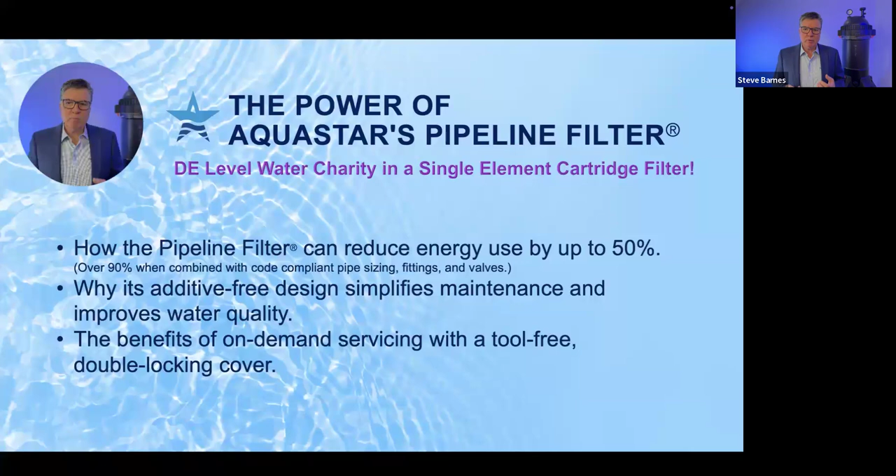Of course, we would love for you to try and use our pipeline filter, but there's really things in this presentation that will benefit all of our pool industry pros, pool owners, and everyone alike by applying some good quality principles to all filter technology.

So with that introduction on where we're going to spend most of our time, I do want to tease that for those of you that were not in Dallas at the International Pool and Spa Patio Expo, sorry Scott, we introduced the new 3, a partnership between Poolside Tech and the Pool Attendant.

Raypak, who makes multiple heaters and hot water heaters, you maybe know them better as Rheem. And then, of course, AquaStar.

We have partnered to basically fill out the pad with us, 3 American-based, privately owned companies working together to bring new opportunities, and for sure safety, in this filter behind me.

You know, the Avia heater and what Raypak does with heater safety. Poolside Tech has got all kinds of safety built into it, knowing if valves are in the wrong place - that's a state-of-the-art control system.

Efficiency - you combine all of these technologies together to come up with a pad that's, in my opinion, best in class for efficiency. And innovation - these are award-winning products, and I've got a little video showing that. Multiple years where these products were national award winners, so we can say look at that, it's not just our opinion.

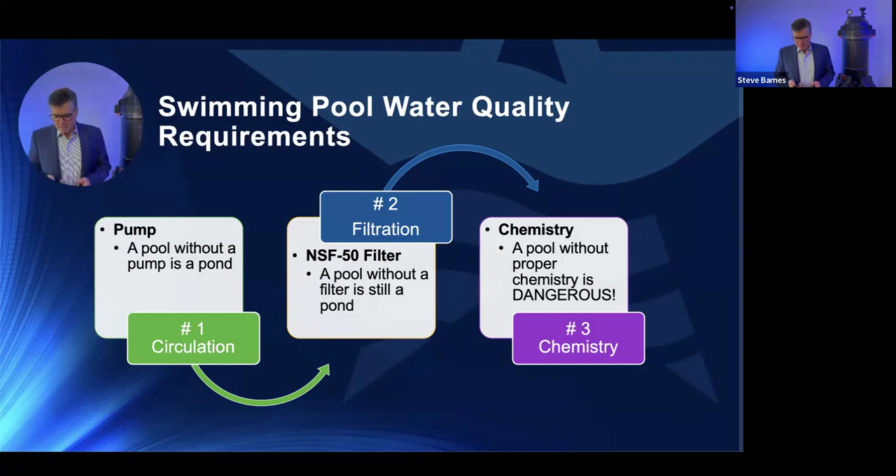So I'm going to focus on number 2, filtration. I think you're going to discover some new stuff here that was new to me within the last couple of years. First of all, NSF filters need to be certified to NSF ANSI Canada 50. That's the standard referenced in the Model Aquatic Health Code, the International Swimming Pool and Spa Code. You look at the PHTA ANSI standards, IAPMO's pool code - any of these, they are all going to reference the NSF 50 standard. That's why we're going to focus on that in detail, because it regulates how these filters are produced.

One of the core elements of the NSF 50 standard is pressure safety, air relief valves, all kinds of things related to that, and cleanability. But really, why do we use filters is to clean up the water, and the term for cloudy water is turbidity. What the NSF 50 standard requires is that every filter go through a turbidity reduction test, comprised of water that's made cloudy with silica number 140.

It's a product you can look up in the NSF standard. It's basically silica sand, from sort of sand in your hand all the way to just a fine powder. When you mix that in, per the standard, into the test tank that we're going to call our pool, the turbidity level looks like milk, is the way it's been described. I haven't personally seen this test at NSF, though I've seen a lot of others. The turbidity starting point is measured in NTUs, the units, like PSI is for pressure. So turbidity units are NTU, and that milky water in this case starts out at 41.

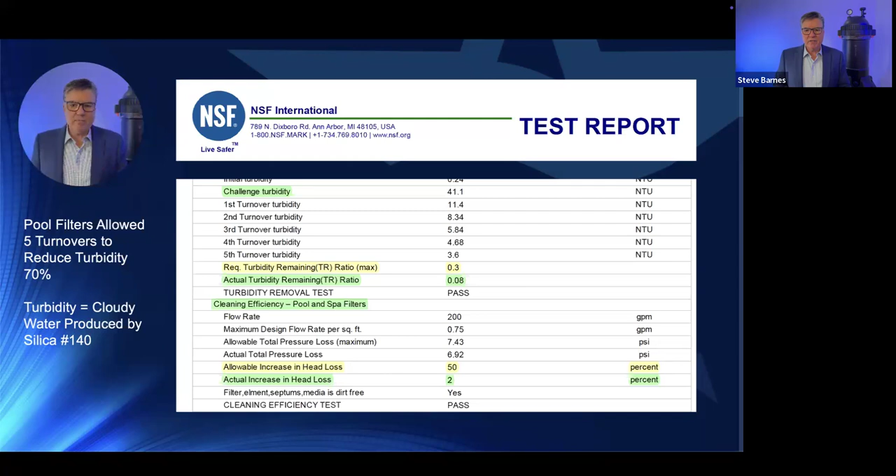So moving along, this is looking at the statistical side, which I learned from studying and attending Dr. Amburgey's World Aquatic Health Conference presentations on this subject going back 10 to 12 years, reading his research papers, and also doing research as part of science compliance for AquaStar.

If we look here, NSF 50 level 1 is if you turn over that pool one time and it removes at least 70%, reducing the turbidity by 70%, then that's its passing level. I think we could call that an L1. It's not an official designation, but with flow meters and test kit accuracy and all kinds of things at NSF, they label the top performers L1 down through lower levels. For flow meters, I think there's an L20 or something like that. So I just applied that concept to this.

Now by comparison, if we go up to the L0 - I didn't know what else to call it - that would be a 100% efficient filter, and they exist. They're called RO filters. The problem is if you've been around them, your faucet will run at 9 gallons a minute, and you're lucky if you can get a quart a minute out of an RO system because they filter everything out so finely. For every gallon we receive from RO, most systems require backwashing with 5 gallons, and even then we have to replace them depending on how nasty your water is - maybe 3 times a year in a really bad area, or once a year otherwise. So the bottom line is the technology to filter 100% is there, but it's not practical in the pool industry.

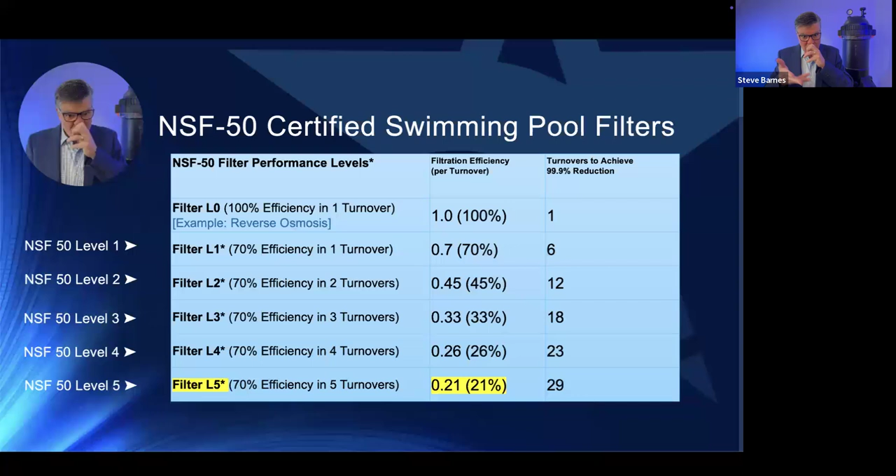Now, I actually have pictures, but they didn't make it into the presentation, of two RO cartridges. Actually, we just use them for pre-filters, so they'd be probably what we'd call an L1. The way those cartridges work, threaded into sort of canisters, is they collect the debris in the fabric, and they're real thick. They ultimately will plug up, just like an RO system, but there's no way to backwash them, so we throw them away and replace them.

So every 5,000 gallons, we replace our fill water filters in the lab. That's what I have pictures of, but not in here.

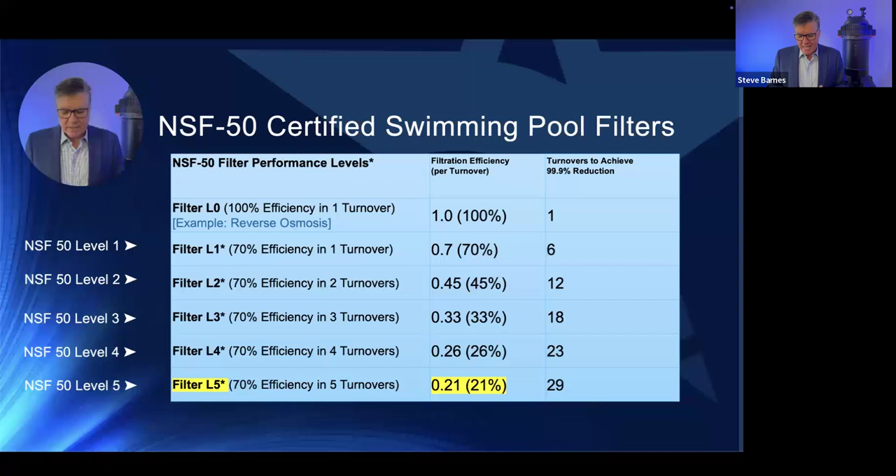The reason I point this out is we can definitely get to really high turbidity reduction with very common filter media that's out there, that our filter manufacturers make for RO and that kind of thing. But the problem is you can't clean it, so it's a replace-it kind of scenario. That's why we don't use it in the pool industry. We could, I guess it would be a revenue service until they replaced your filter.

But anyway, so that's sort of the backstory on that. Long answer, sorry about that.

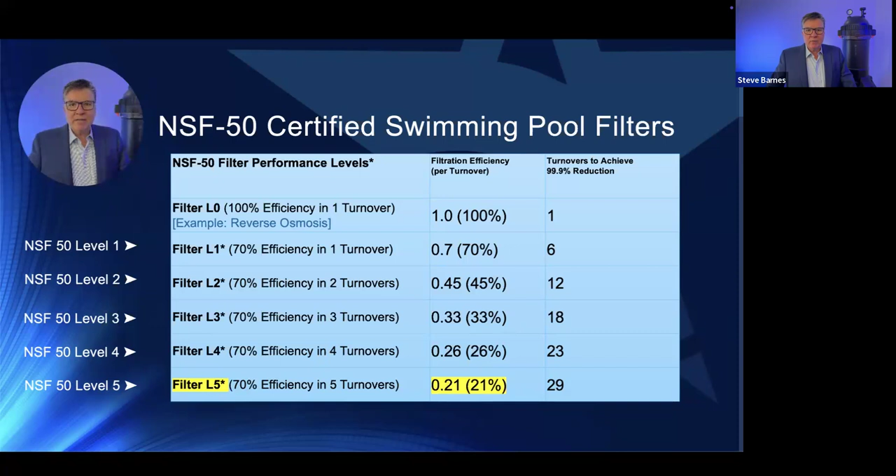Oh, that's good. And you still have your hand up, so if you want to put it down, that way I'll know if you have it raised. Oh yeah, it's like a regular Zoom meeting.

Okay, so here's just a close-up where the level one, I'm just zooming in for those people that questioned, wow, it's not a 520 square foot filter, so the pipeline can't be as good. Well, here's the proof. So one turnover, we go from 41 to 11.4, that's the 72%. And then you can see the turbidity reduction, where we end up at 3.6. You can't, water's clear at 5, just to give you an idea.

Well, I thought I saw you putting your hand up there, Scott. I was going to say, five turnovers, that was just...

Yeah, so as soon as you pass 70%, which we did in one turnover, DE does certainly in one turnover, but it would have an even lower NTU value. So with the pipeline filter, let's say it was 11.4 after one turnover. What my understanding is, DE would be down in that 4 to 5 range in one turnover. So there is a big difference with DE versus the pipeline filter. But when we look at the turnover, within 2 or 3 days you have DE level water with a pipeline filter versus in one day with a DE filter.

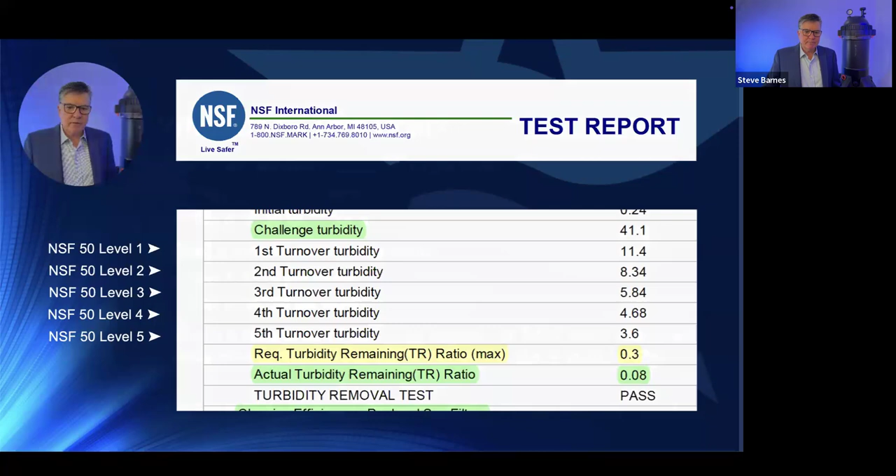Now let's put this into comparison, if you will, or sort of what does this mean. So let's say the electrical cost is 15 cents per kilowatt hour, and filter A, which is a level 1 filter, turns over the pool in 2 hours. For whatever reason, we're going to operate them identically.

So it takes 2 hours to achieve the 70% with filter A, which is L1, while filter B being an L5, to get to that same clear water as measured during that filter testing, you're going to have to run that pump for 10 hours to get to the same level of water clarity.

So you can see that's a big percentage increase.

If we take that out to a month, and obviously we're running filters—well, that gets into the program I'm going to come up to next. So if we look at that over the course of a month, filter A is $9 a month total cost, and filter B would be $45 a month to achieve the same clarity based on identical test circumstances.

So if somebody dumps a bucket of silica sand in the pool and we want to get it all out—remember there are two other elements: we need a pump, filtration, and circulation. We have to stir up the stuff in the pool, and we have to run the pump, because if it's not running, we're not going to filter anything. If everything's settled on the pool floor because we've turned the pump off for 18 or 16 hours a day, the only way to get that silica off the floor is to brush it, vacuum, or use an automatic cleaner.

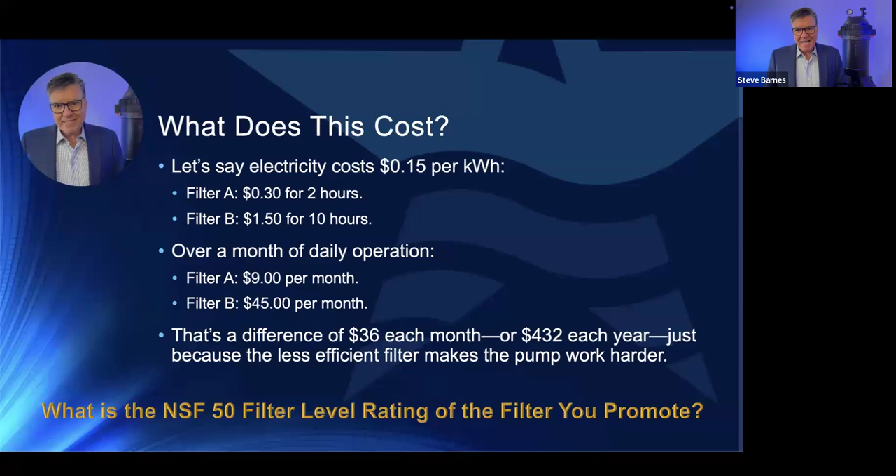So this gets really complicated, and this is just analyzing the filter itself. My challenge to you is, for pool pros: what is the efficiency of the filters you're installing? Are you a $9-a-month service provider or a $45-a-month service provider? Or maybe you don't care because the customer's paying for it—it's their electric bill. Anyway, that's kind of the philosophy we're looking at here. We think we can do better.

So now I want to take a couple of minutes and go into some of the features. Let me just look—I think my next part, after this, yeah, after this, we will have the filter salesy bit kind of stuff.

So this is the pipeline filter. This one happens to be 200 square foot, and we also have a 250 square foot. Not that the square footage matters, because we're talking about performance, but that's how the industry sort of knows them. That one's just 7 inches taller—it's the identical filter element.

One of the key features of this—when we got into it, Olaf, the owner of AquaStar, came in and said, 'Hey, I want to do a filter.' And I was like, oh boy. I sat quiet, and then went around—oh, we can do all of these things. They went around the room asking how many want to do a filter, and sales, engineering, management, everyone gave a thumbs up, and I gave a thumbs down. The reason is because of safety.

In 1989, when I was working for the in-floor cleaning system company, a homeowner was literally killed by a filter. It split in half—it was stainless steel. The problem was the bolt wasn't tightened. They were told to leave it alone, but the homeowner turned on the pump anyway, and it knocked her over into a block wall. We got called in. I came in to represent the company and had to go through that whole legal process. The filter lid ended up three backyards down.

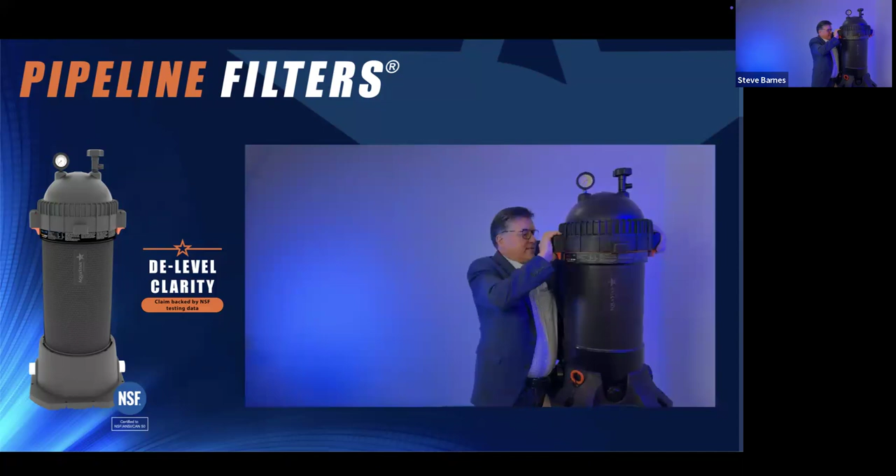Sorry to face away, there we go. This helps when you have it connected to pipe and plumbing. So, okay, let me go back.

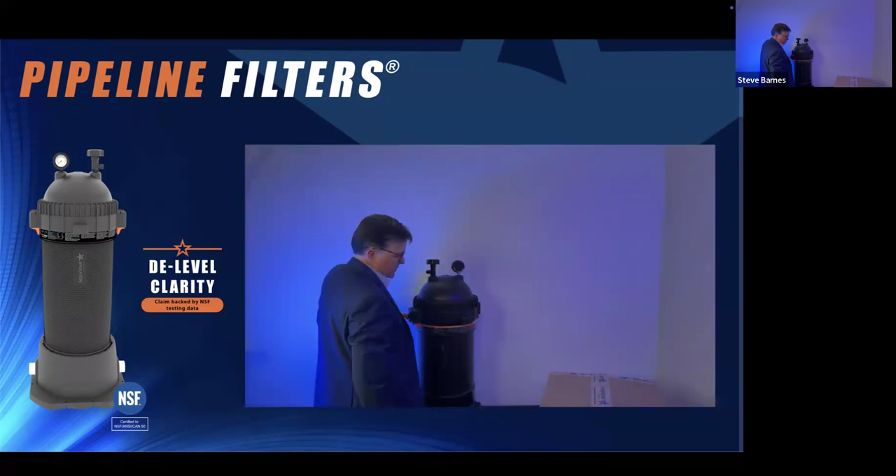So, 2 hands to unlock it. Then it comes around, it's decompressing the O-ring right now. When it comes around, you hear it click again. It's locked, but this is completely free on top. So if the pump was running or there was pressure, it's just going to relieve that pressure, and it's designed to literally blow down the outside of the filter. So you might have a bad day that it gets your tennis shoes wet, but it's not going to take your head off. And then to finish releasing, you have to unlock it one more time again to remove the human error factor, and it just comes off.

Convenient is this spin, so you can always point the air bleed valve and the pressure gauge any direction you want. And then after that, it's very easy to get at the cartridge filter itself.

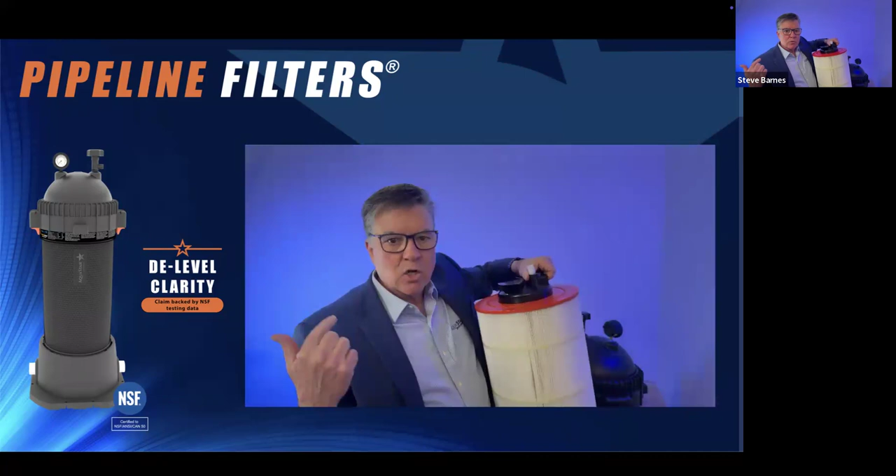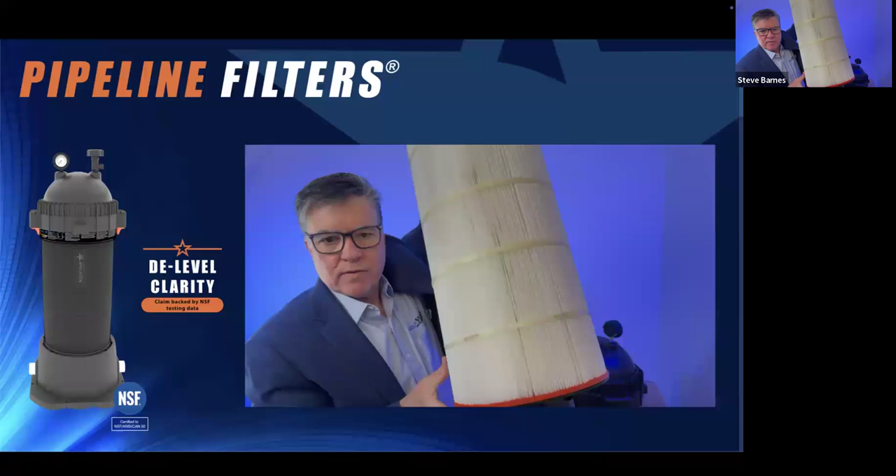Now, this is a proprietary design insofar as our filter element is really big and deep. We designed this entire filter specifically from a hydraulics point of view so that the water comes in from the bottom. It goes 360 degrees around the edge of this plate, because you can see this is solid. Water comes in out here by where I'm standing, but you see these little divots here? They not only center the filter inside of the pipeline housing, they create nozzles that spray the sand, silt, and debris up the outside edges of this filter.

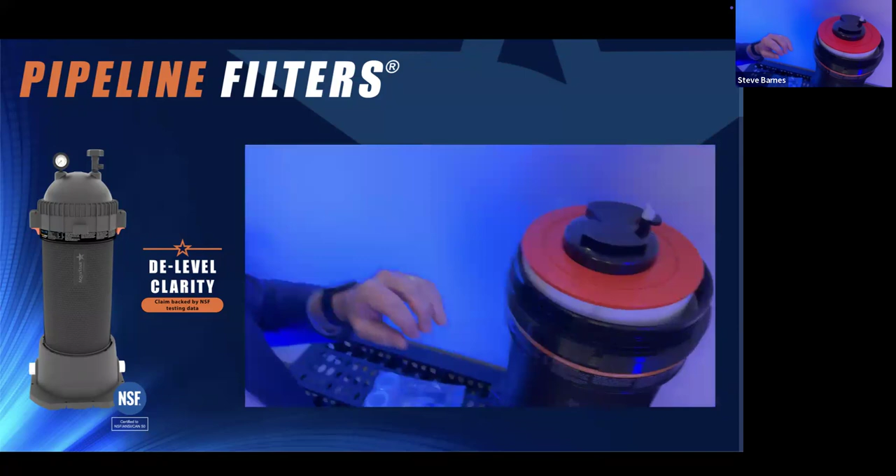Because this is such an important feature, I'm gonna unplug this camera and we're gonna go walk about. So if we look here, see this clearance? It's uniform all the way around. Oh, I'm gonna make everyone dizzy, including myself.

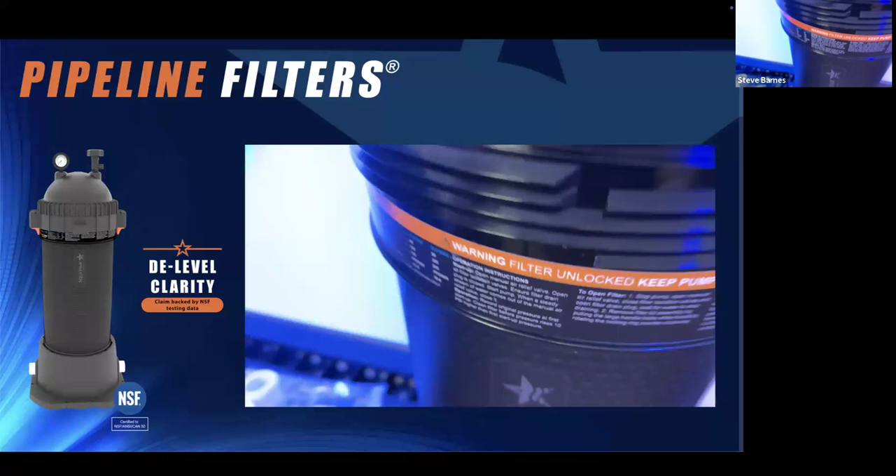So what happens is the water comes in from the bottom, it sprays all the way around, it goes up underneath the dome, and then it evenly coats the cartridge elements.

And because they are spaced, we did not chase square footage. We could have easily put 300 square feet into this. It's real simple, all you have to do is just put more cloth into it. So we could create a Kleenex box and try to filter through the edge of it and claim and match 300 square foot, or 320, or whatever. But that doesn't filter well, it just creates a lot of back pressure.

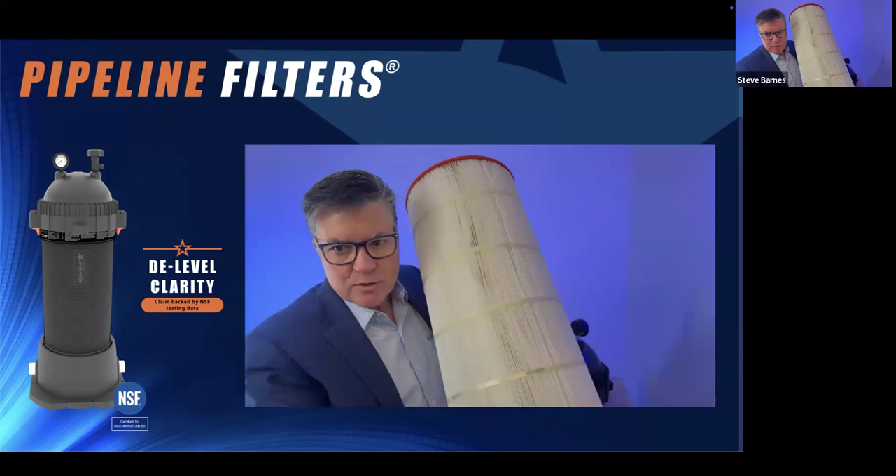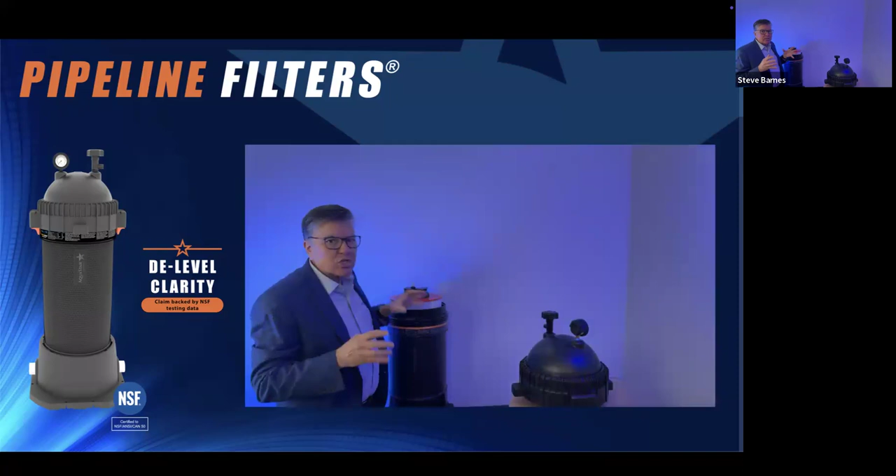We focused with the expertise of the people who make this, it's Pleatco Pinpoint, so they are the experts in that. We were the experts in the hydraulics, I would like to think. And so each one of these pleats, inside and outside, is usable surface area. And that's where we're able to get that turbidity reduction of 70%, 72% in one turnover, because we actually are capturing that silt throughout all of those pleats.

So instead of the pleats being like this, where it's only going to get stuck on your fingertips, they're open inside and out, if you will, so the water can come in and flow into the center. That's giving us our best, not the very best, but one of the best hydraulically efficient cartridge filters.

And by comparison, this is NSF data: this one out of the box compared to a 520 or any of those in that class — I'll use that one because I know the math — is 7 PSI less with brand new clean filters. So out of the box, if the other filter running at 100 gallons a minute, or whatever that test is based on, I think it's 150, it's at 10 PSI. At that same 150, this filter will be at 3.

So think about that from an energy efficiency standpoint. One, your pumps can run slower, and it's quieter and saves energy. But also that means with this filter, you can go 7 PSI of debris before you get to where the brand new, much bigger one would be. So filter square footage just doesn't matter.

And if I'm wrong relative to those other filters, they have the same test reports we do, and they can share them, and then I'll stand corrected. I can only use what I know publicly.

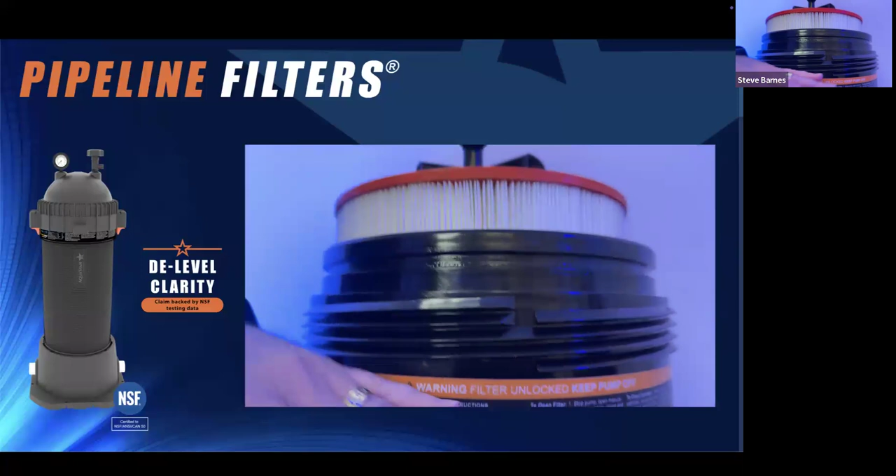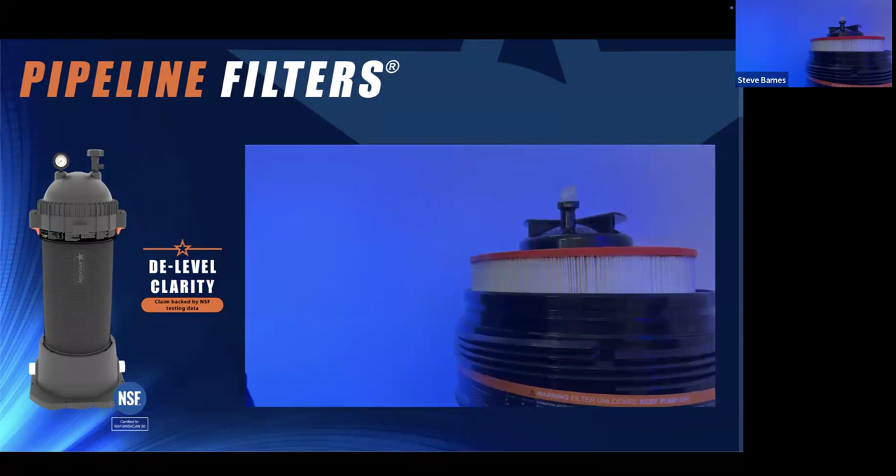So we have the hydraulic benefit, we have the safety benefit, and the way the safety benefit works, I'll show it because people have these things. If you look here, there's basically 2 sets of threads. One is plenty strong enough to go to 200 PSI, which is what this filter has been tested for. Then when you continue to raise it up, it's still got 100% of that 200 PSI strength, even though the O-ring has been disengaged. And that's where the safety of this comes from. Combined, giving you a little behind the scenes studio view here.

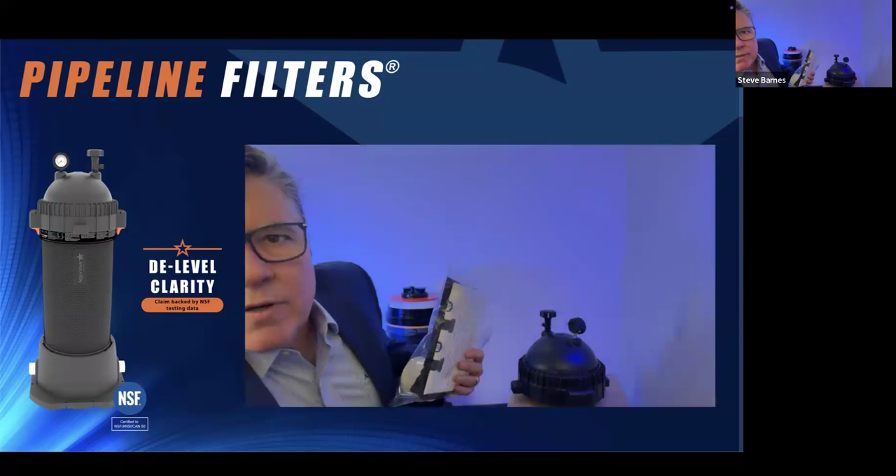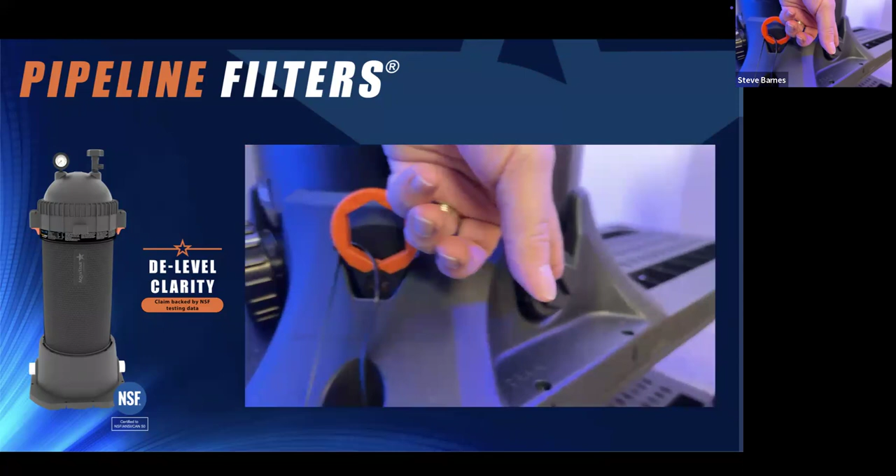So that's the key to the safety feature of it. Down here, you see this interesting tool - it's zip tied down. This tool comes with it because we advertise no tools required, but then we had a very astute service pro say, I need a wrench to open the drain plug. Ulof, the owner, said okay, and so now you get one of these fancy tools with every pipeline filter.

So that's something relative to what comes with it - some of the features is it's union. So it's either 2-inch or 2.5-inch slip that's included with this.

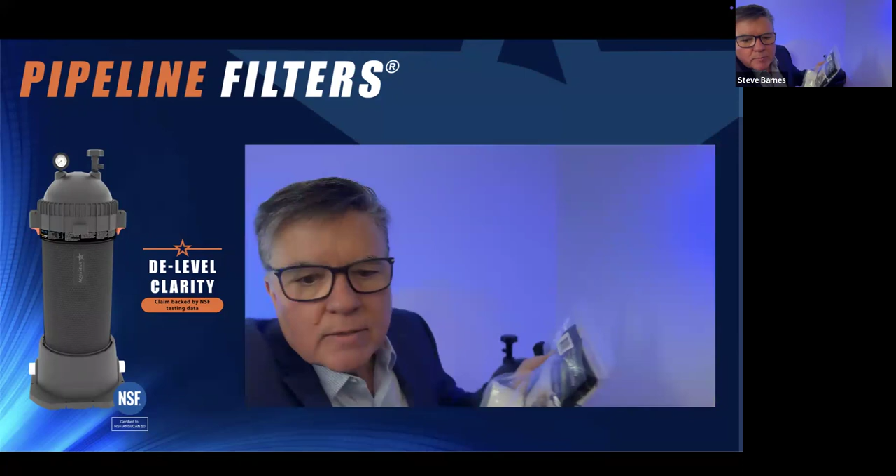Some of the things obviously come with the instructions and things like that. One of the things I would point out, it does have a huge high-flow air relief valve, so that's quick and simple. The gauge is stainless steel.

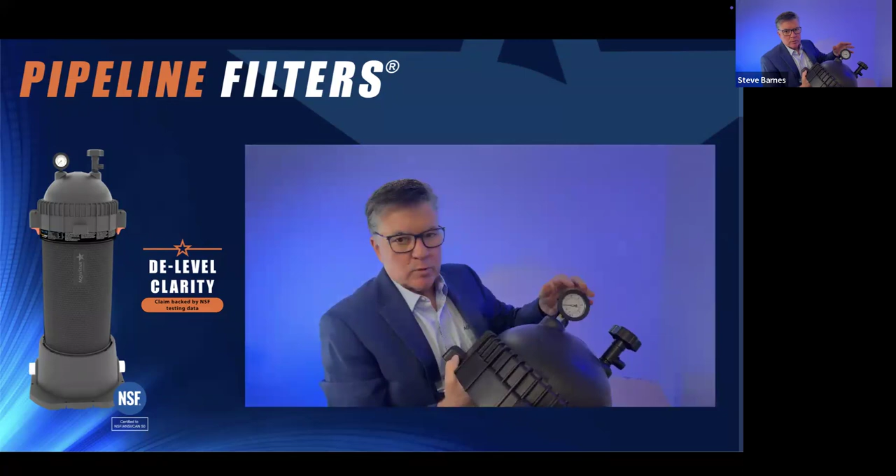Ulof, he's a tool maker, so he loves quality - with a rubber boot. So we really didn't skimp on this, relative to state of the art, or relative to quality ribbed gaskets that self-capture so you don't lose them.

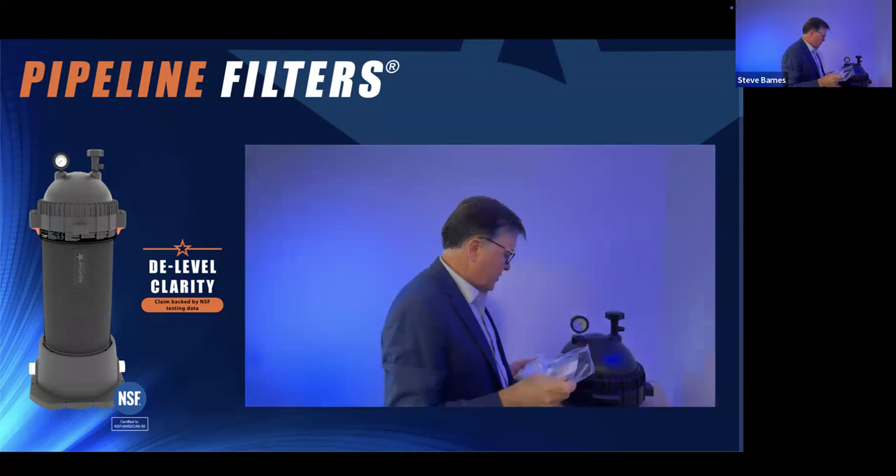One other thing I want to briefly touch on - heads up that the O-ring ships in a separate bag so that it's lubed and clean and ready to go. That way, when you're installing the filter in that dirty environment, you can get things up and running, and then when you're ready to start, you get a nice fresh O-ring to go with it.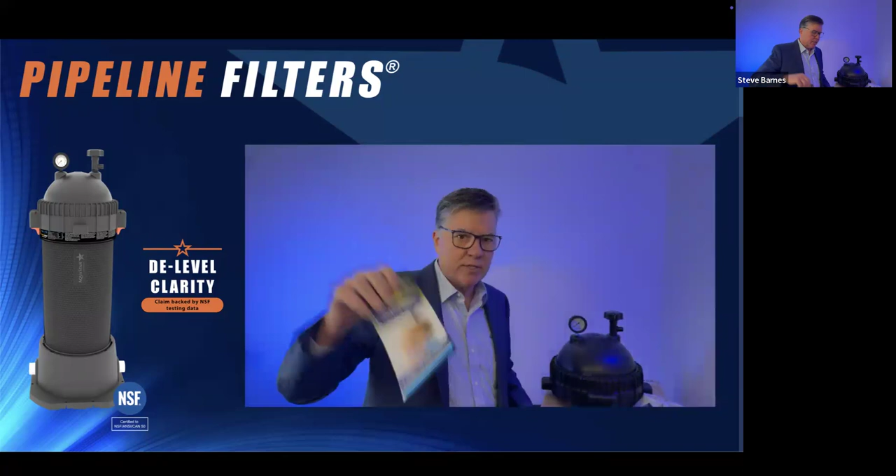One other thing that comes with our filters and our pumps - this is a different story, but we really are advocates for safety and having fun around the pool. We have partnered with AquaStar, Every Child a Swimmer, and Step Into the Swim. A portion of these sales revenues comes with it, and we encourage contractors to talk to pool owners about general safety - from VGB to CPR training, swimming lessons, fences, door chimes, supervision, some stuff like that. We're trying to be a good steward as a company. We've just recently launched this, and we ship that with all of our products.

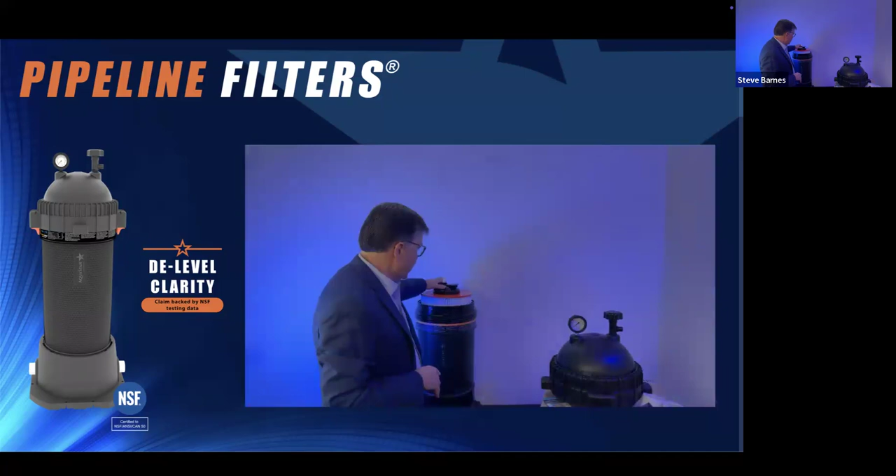Relative to the filter itself, it's got some more technical features. Let's see if there's anything in this next slide that will help. I talked about the patented housing, 360 degree. I talked about the pleat spacing.

The core - so this is a coreless element. Some filters you can buy and they have a core, but why buy it every time for manufacture? One of the things that improves that hydraulic efficiency is the core has 64% more opening compared to the legacy historical cartridge filters. So it's not only easier for the water to go through the filter, it also means the dirt has more places to go.

So if you picture a core that's just got drilled holes, you'll see that the filter media is dirty right in front of them and not beside it, because there's nowhere for the dirt and water to go. Little things, but that's the kind of stuff we've looked at, working with a very progressive engineering-based company.

Okay, moving along, we've got a few minutes here. I want to get into this case study - two different sizes. This is the PLF27000, and you see we didn't use square footage. What we did is the 27,000 - this filter is NSF rated for a public pool up to 27,000 gallons. The bigger one is rated for a public pool up to 35,000 gallons, actually 35 and 900 or whatever. But we named them after their public pool certification rate, because if it's good enough for a public pool, it's certainly good enough for a residential pool.

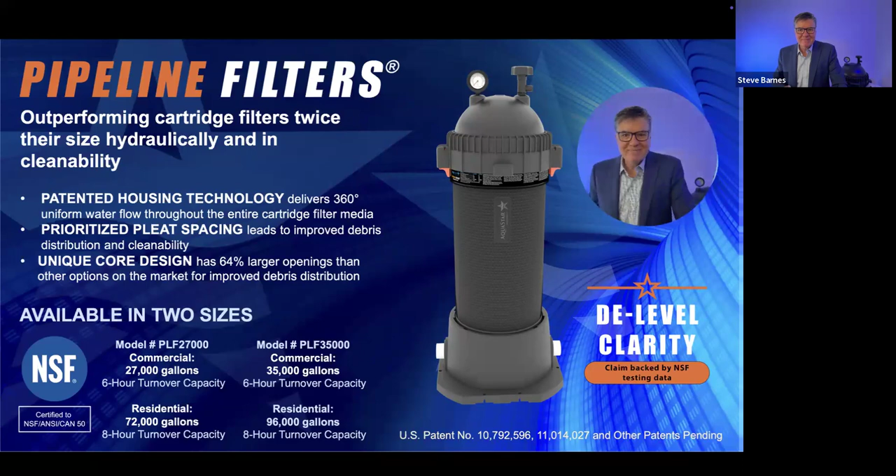Okay, so here is a demo of that filter function in operation. This video doesn't show it, but it was basically 2 PSI on that, and it was running like 60 gallons a minute. I'll be honest, I had to add a lot of extra silicone lubricant to the O-ring so that I was strong enough to do that.

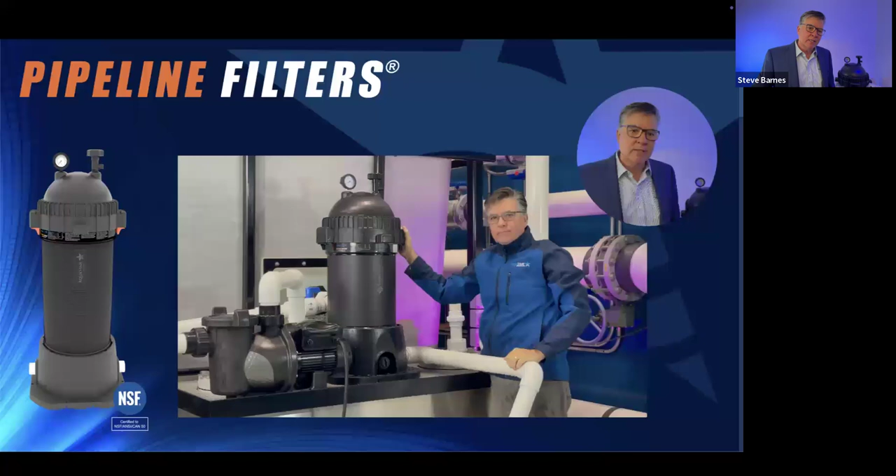In fact, I'll go back one, and if you look close, you can see I'm trying to keep a straight face while grinning to turn it. I tried to make it look easy. It's not that easy, but there's the safety functionality of this, so we're pretty proud of that. That made it an easy yes when I saw this, and this is before we knew how good it was going to be hydraulically and all that kind of stuff. So pretty cool, anyway, there's that.

The reason we are so engaged with Pool Nation is they are really trying to take pool service companies that start with no knowledge. It's an easy industry to get into, and elevate their basic level skills of chemistry, water, filters, wiring, connecting stuff, how to tear down heaters, that kind of thing, all to get functional employees with hands-on ability, but also to prepare them for things like becoming CPOs, moving into Genesis, Watershape, and all of that.

So at AquaStar, myself personally, I think that what we're doing, be it Pool Nation, IPSSA and others, where they're offering, and manufacturers, those are all good things that bring you up to the level of what you need to know as a pool pro. And then please continue into further education, because it's a great career. I've been doing it for 41 years, and I would encourage you to follow along. But so that's a little bit on Pool Nation.

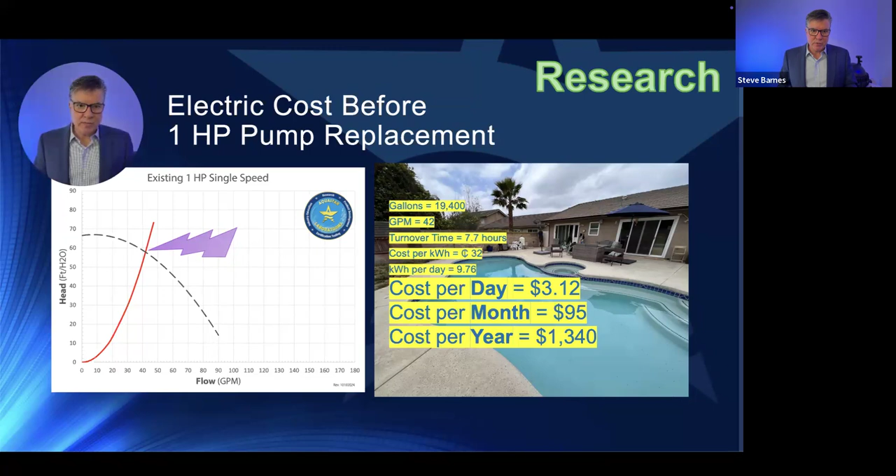This pool is 19,400 gallons. Operating one turnover, it was at 42 gallons a minute, that means 1 turnover a day. I think the pool was running 7.7 hours. So you can see it's $3 a day or $1,300 a year for this old single speed pump that got replaced with a variable speed version of the same pump.

Variable speed pumps are almost always more powerful than the single speeds they've replaced, and you can see that with the purple line. So now what's happened is, because it's more powerful, it's running at 46 gallons a minute. But it increased the watts, it actually increased the power requirement by 18% because it's moving more water.

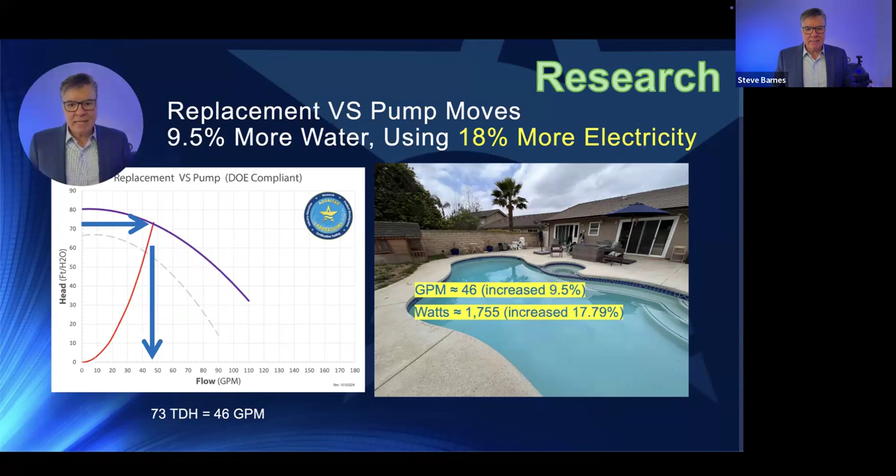My point is, if you just do a like-for-like variable speed pump replacement and run it on high speed, treating it as the single speed pump it replaced, you are costing more money. You're moving more water, you're filtering more water, but a month after you replace that, two months at the max, you're going to have a pool owner going, what in the hell? Why did my electric bill go up 18%? That's happening day in, and that's a whole other variable speed conversation.

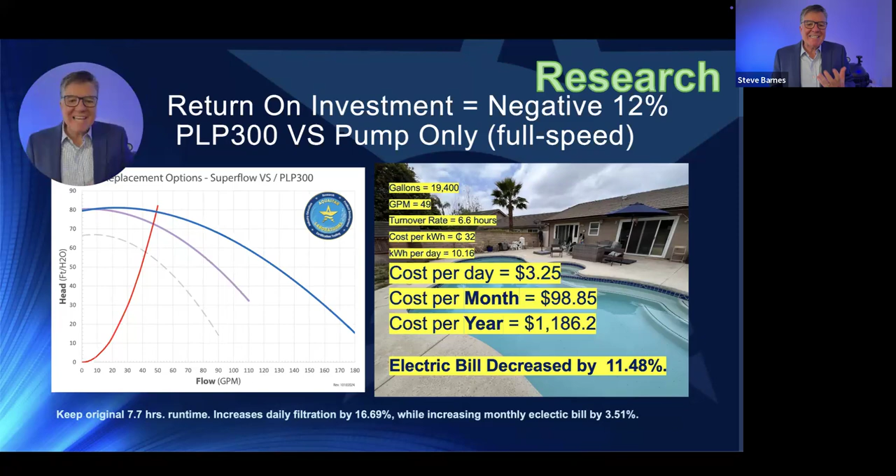But now here, another thing, not all pumps are equal. Because this is AquaStar, the top line is the AquaStar pipeline pump that we replaced it with. But this is without replacing any of the filter or any of that. So you can see it's a more efficient modern pump, because the pipeline pump was designed after the federal rule, we designed it to maximize efficiency. So it does better than this other one.

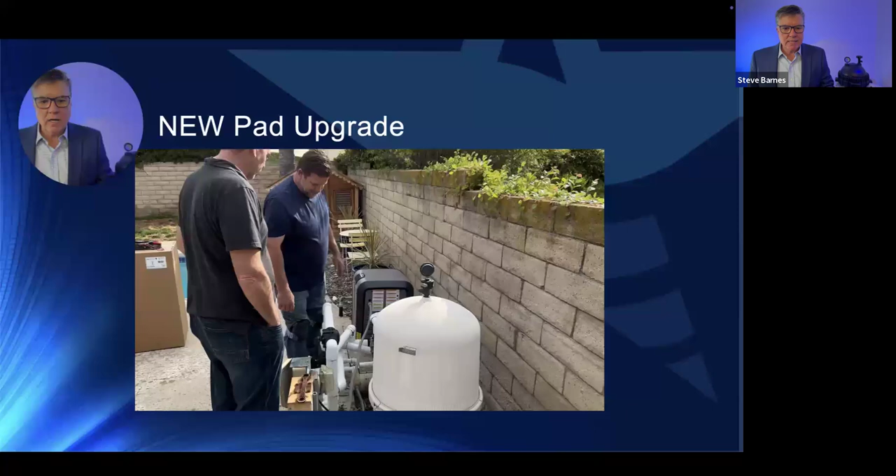Here I'm just going to go through. Here is the equipment pad before retrofit. I tell you, we did not replace the heater, the heater stayed the same. Everything else we cut off at the ground and replaced it.

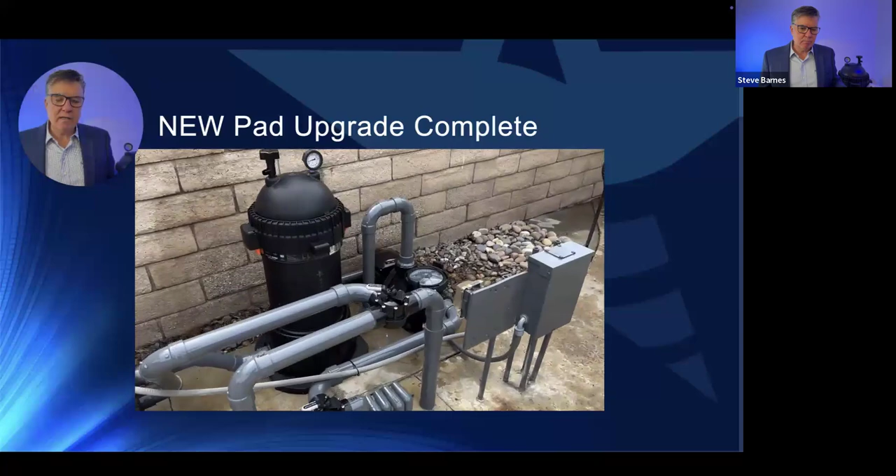And then here's what the new pad looks like. So it's 2-inch pipe before, and both were 2-inch pipe. It's 2-inch pipe to and from the pool, which is 10 feet away, not a big run. All the little pipes are the spa jets and stuff like that. But you can see this installer did a nice job of cleaning up the pad.

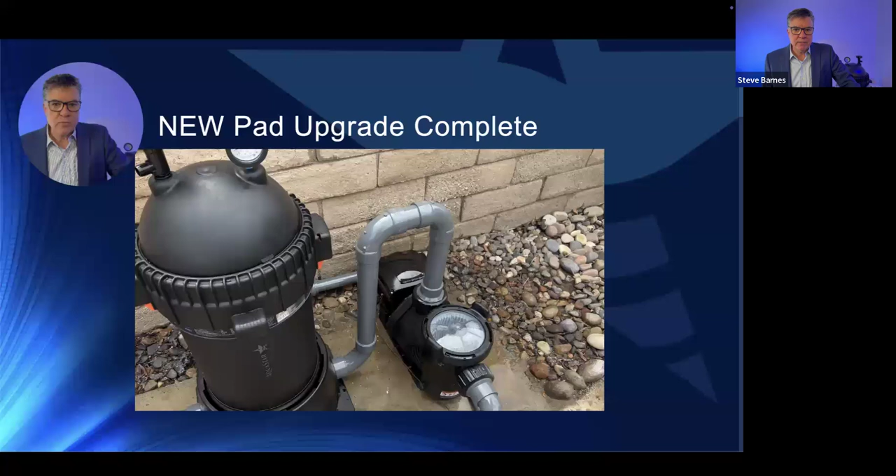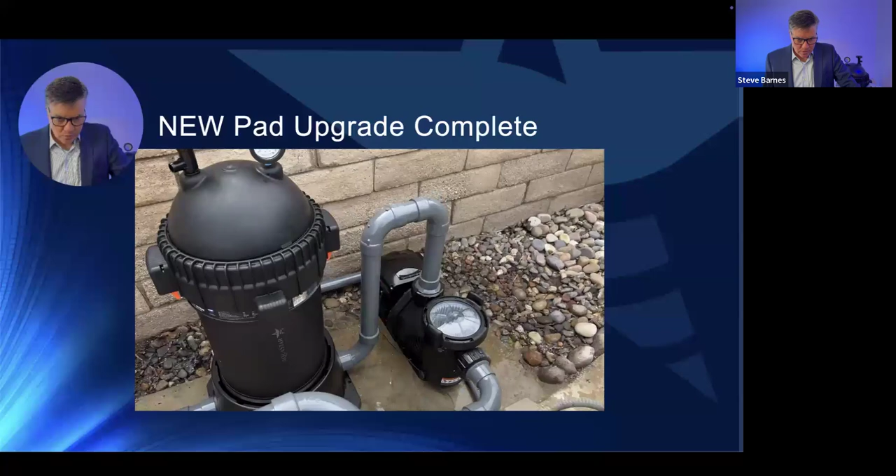If I go back to this one, you can see the pump's on the left. It goes all the way over to the right to the filter, and then back over to the heater, and then back to the distribution valve. So a lot of the percentage savings you're going to see here is just thinking through and doing a better pad install. And then we get the bonus: it's a more efficient pump, and in this case, a 7 PSI more efficient filter.

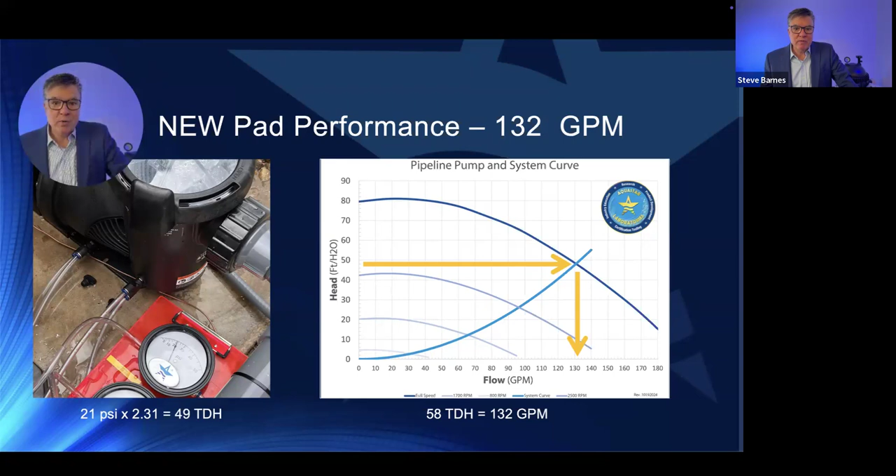So here's what that replacement pad head loss curve looks like, the system curve. Now we're way more efficient because of this filter, so we're going to move a lot more water. We went from 42 gallons a minute to 132. Now, if we stay at that and just run it the same, it's going to cost more money because it's filtering faster.

So if you run it at high speed, but if we just reduce it and turn over the pool once in 2.5 hours - not an advocate of that - but if you did that, you could reduce their energy bill by 53%. But now the water's stagnant for 22 hours, algae can grow, and skimmers are not working. So this is not the way to save money.

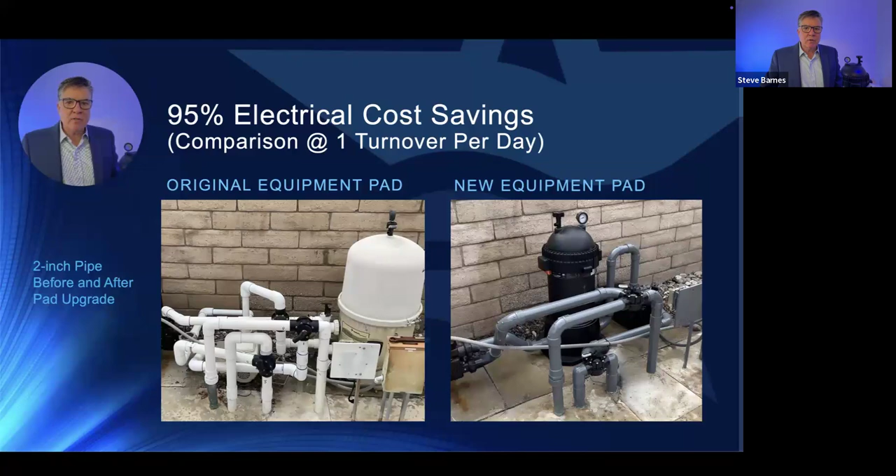What we want to do, and what we did, is match the flow rate of the original. Once you do the before and after, 1 turnover a day - where's my summary slide? Here we go.

The water quality is identical. It's a lot quieter backyard because we're running a very quiet variable speed pump at very low speed, and there's a formula for that - that's a subject for a presentation in the future.

How do we calculate all of that? We could share those formulas. It's the law of serial dilution that's part of it, and then also the pump affinity law. These are all things of physics. It's not opinion, it's math. So huge opportunity with the pool industry to leverage variable speed pumps. They will all give you these kinds of savings when you take the time to do that. That's what's universal across all brands.

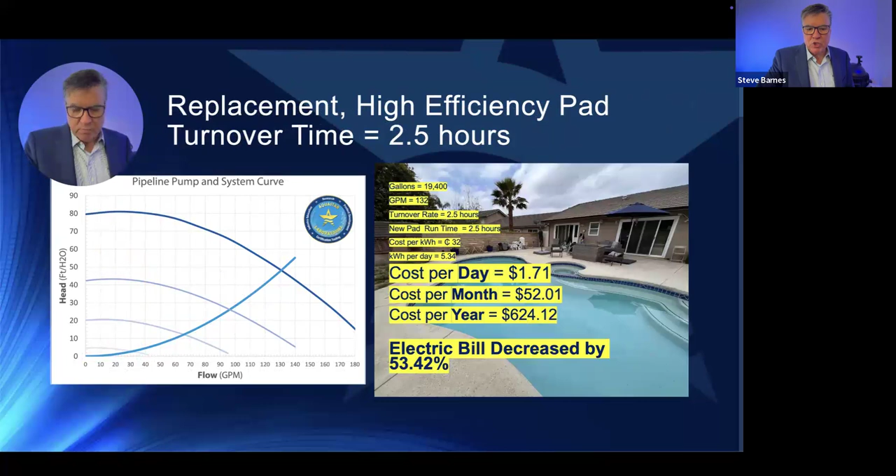This is why I'm saying you can do it and decrease your electric bill, but don't. What we want to do is run it - now I matched what we found with this pool, and that's the way we loved it because we knew it was working. We're doing research and all that, and we don't want to... It was a clean pool. This photo was taken before - it's a DE filter - and the water is just as clear now.

So when we matched it, now what we're doing is 7.7 hours, back to what it was really running. The way I recommend and what I teach in my hydraulics classes is to run 24 hours a day at an even lower flow rate, so you're spreading out that turnover throughout the day. When you do that, you're down to really low flows, so you kind of need to turn off the drains, or up the speed so that your skimmers are working. But we're way better off to keep the skimmers working 24/7, like public pools.

Go figure. And then the other thing is, by keeping water running longer - 24 hours a day, 20 hours a day, whatever - we have the chlorine or halogen in the pool manage algae. But if you pause the pool for 16 hours, it gets completely still, and then the algae consumes the chlorine next to the wall, and now there's this boundary layer where algae is growing, even though you've got 5 parts per million of chlorine out in the middle of the pool. If you just keep the pool moving like a creek, it'll be clearer. And that's one of the reasons.